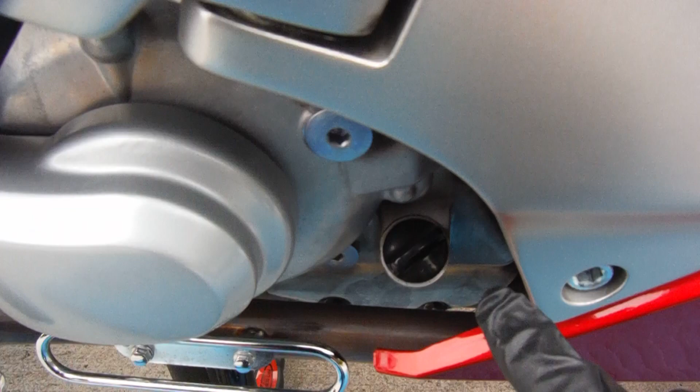2003 Honda Silverwing 600, the FJS600, and we're going to do an oil change. It's real simple, but I'm going to walk you through everything. So come right down here to the oil filler cap right there. That's where the oil goes in. Of course, we're going to take that off before we drop anything. Underneath, it's not too bad.

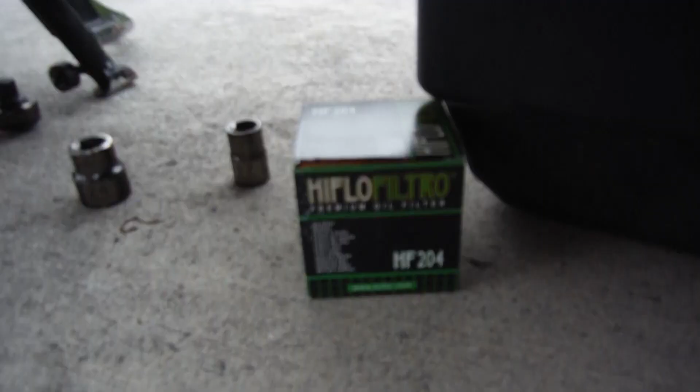This dude right here is a 24 millimeter. You're going to unscrew that, and of course the oil is going to fall out with the strainer in the spring. Right there's your filter. It is K&N or HiFlo filter HF204, and of course the K&N has a 17 nut. I've got my 24 and my 17 right down there. And there's the new filter, the HiFlo HF204.

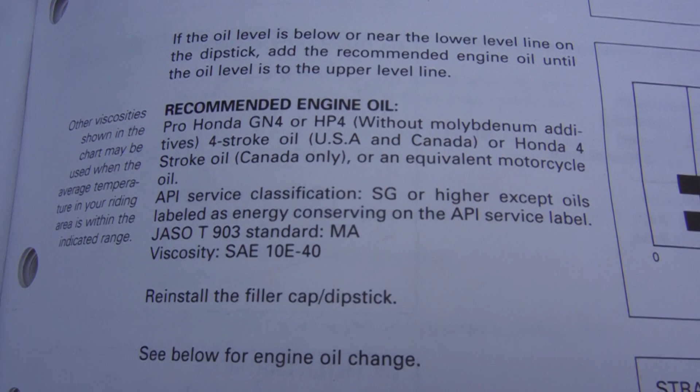A quick look at the owner's manual here, or the service guide. So I was reading it, and as you can see there, standard MA. That is a very, very low standard. If you've had motorcycles in the past that have had wet clutches, this is totally opposite. You know, this is what I normally run in my sport bikes and whatever else. This Mobil 1 10W40 4T. Quick look on the back, that thing goes all the way up to SN.

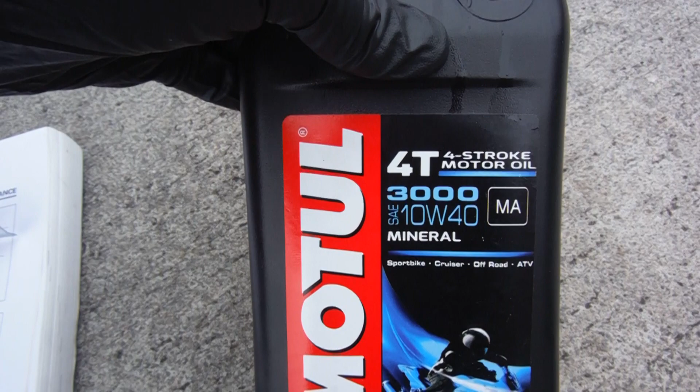I like using synthetic, but we don't have a wet clutch on a scooter, and that stuff may be a little too slippery. So I got to thinking, what actually has an MA standard? So my XR650R has low standards, and this is what I run in it, 10W40 mineral oil MA. That's right, this mineral oil has the MA standard on it.

So the owner that I bought this from told me he had done synthetic oil in it, so I don't know what he was putting in there, but what I did was go buy Mobil 1 10W40 car oil. That's got plenty of quality additives in it, and it's still a 10W40, but we don't have to have the wet clutch since it's on a scooter.

Alright, so let's get back under here, and I'm going to take apart this drain plug so you can at least see what it is. But before I do that, let's take out this little dude so we can get some flow behind it. I let the motor run for, I don't know, felt like forever, 10 minutes maybe, 5 minutes, I don't know. So we got him out. She's kind of sitting there. So, 24 millimeter.

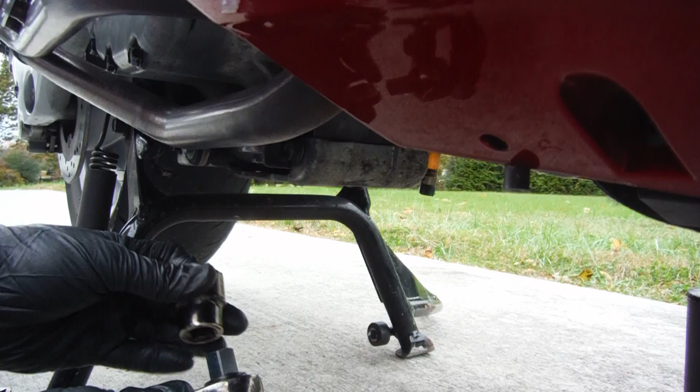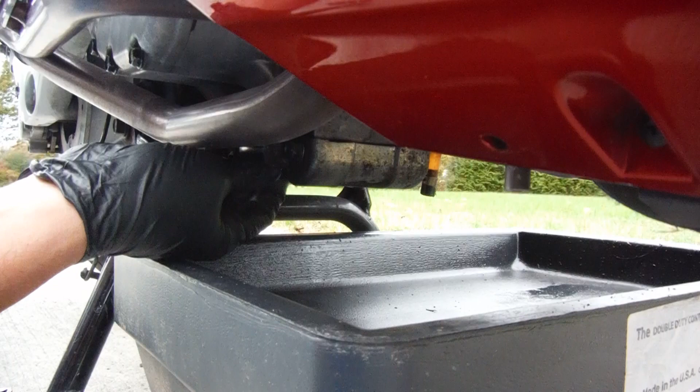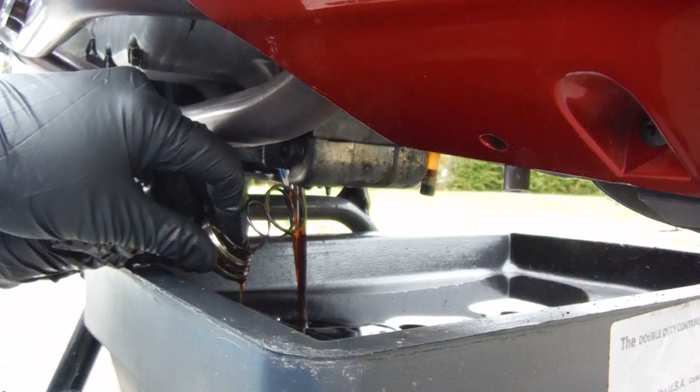I'm gonna get my pan in the way. Pan here, but that's gonna block some of y'all's vision. But I did want to at least show you the setup. Yeah, pan catch everything, and that's why I'm wearing gloves. Alright, so there's the spring and the cap. So there is a strainer piece in there. It did not come out with the spring. So I'm going to set those guys there.

Reach up in there. I can feel it, just going to get it to come out a little bit. Alright, here's the strainer. So we're going to look it over. If it was nasty or something was inside it or anything like that, I'd clean it out with carb cleaner and let it dry, but there's nothing. I do these oil changes pretty regularly, so it's good to go. But when you put it back together, that's how it'll go, right on top of the spring and back in there.

I hope this video helps you all. I know there's other ones on there, but I wanted to get some where you could actually see it.